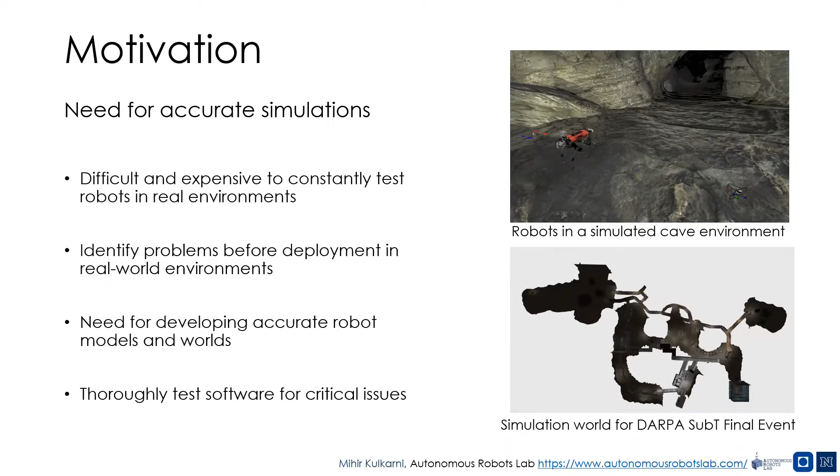This work is presented in 3 parts. The first part focuses on developing the capability of performing accurate simulations. The process to create robot models and simulation worlds is described to rapidly test and evaluate algorithms before deploying them on real-world systems. Using these capabilities in the second part, a framework for multi-robot coordination for exploration of complex underground environments is proposed.

A complete framework for centralized multi-robot planning strategy to efficiently explore the environment in presence of communication constraints is developed, and evaluations are performed in simulation using multiple robots. The robot models developed in part 1 are used to evaluate the performance of the framework. The final part of this presentation details the contributions to the DARPA Subterranean Challenge as a part of Team Cerberus.

Field testing of robots in real environments is necessary. However, during the deployment phase, it may turn out to be time and resource consuming. It requires significant setup time, and minor issues in hardware may take hours to resolve. With all of this, the testing of algorithms during development is delayed.

A faster alternative to performing real-world tests is by running computer simulations. They are fast, repeatable, and with the advent of better simulators, they are becoming increasingly reliable. It is possible to easily test out the algorithms in simulations to debug and evaluate them quickly without fear of any damage to the robots or to its hardware. While real-world tests are necessary before large-scale deployments, as they point out issues in the systems, simulations help with rapid development and testing to ensure that the software on the robots is bug-free.

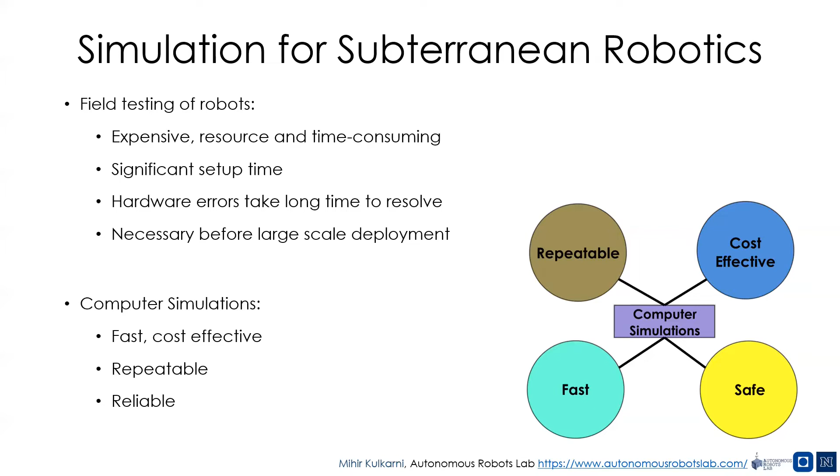We develop robot models to accurately simulate the sensors and dynamics for testing our planning algorithms. Ignition and Gazebo simulators are used with ROS-based interfaces, allowing to interact with the simulated entities. These simulators use an XML-based robot description language. These are the URDF, which is the Unified Robot Description Format, and the newer Simulation Description Format, or the SDF. These formats allow description of components, actuators, sensors, and links on the real robot. In the next few slides, I will describe the process to create simulation models for the Ignition and Gazebo simulators.

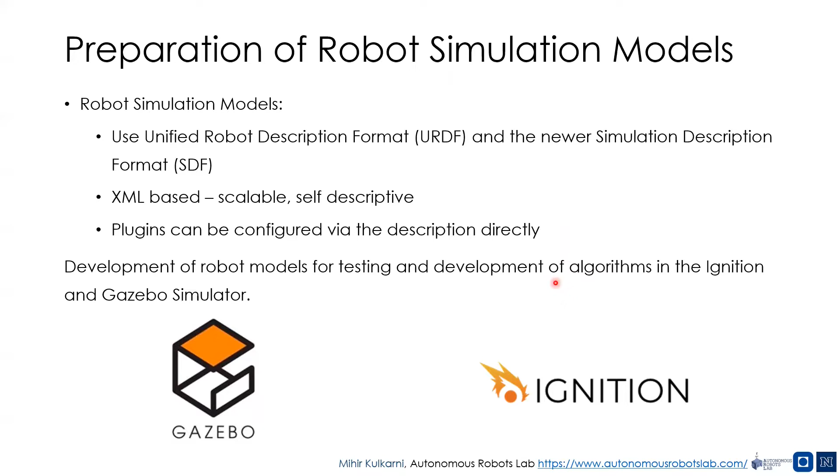A robot in the Ignition simulator is defined using a central structural component with sensors, actuators, and other entities connected to it. The code required for the functioning of simulated components is dynamically loaded as plugins as the robot is spawned in the simulator. The visual component of the robot model is a textured mesh exported from a CAD modeling software. A similar mesh is defined for collision, and this is checked with the environment for detecting the collisions of the robot with the environment.

The rotors of the robot are defined with respect to the base link, and a revolute joint allows the motion. Each rotor is connected to a simulated actuator, which in turn is controlled by a multi-copter plugin responsible for providing a high-level control interface to the user. The dynamic characteristics of each of these models are also closely matched with the real robots using data with the aid of motion capture systems. Various components and sensors on board the robot are added, and their parameters are based on the configuration of the sensors on the real system.

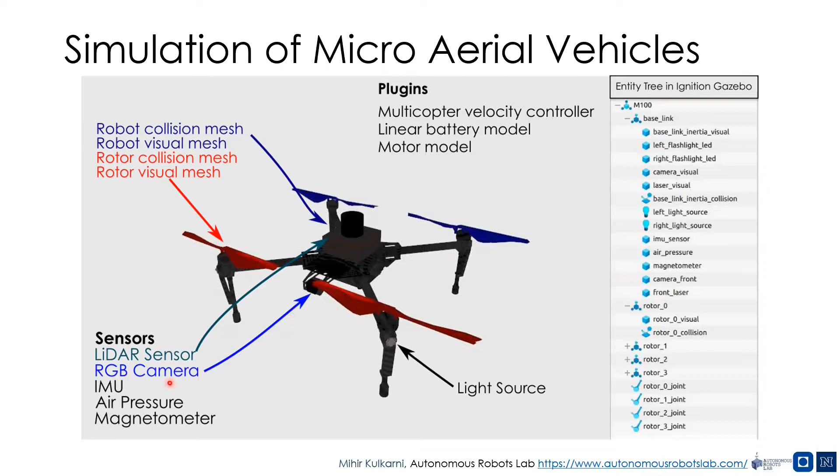This process was used to model the robots submitted for the open source repositories for the DARPA Subterranean Challenge. Simulation models for 4 flying robots were developed: the DJI M100 Aerial Scout, Gagarin, Resilient Microflyer Obelix, and a lightweight version of the Resilient Microflyer.

The robots 1, 3, and 4, that are the M100 Aerial Scout, Gagarin, and RMF Obelix, each contain an RGB camera and a 3D LiDAR sensor, while the other model, which is the lightweight Resilient Microflyer, contains only a stereo camera and 4 range sensors pointing radially outward from its center. A vertical time of flight sensor is also simulated atop the Gagarin simulation model for it to be able to see the surfaces of the ceiling.

As you can see, all models except the M100 Aerial Scout are collision tolerant and provide protection to the sensors and propellers using a cage-like structure. This allows the robot to endure collisions during the mission and continue exploration without damage to any of its components. These models are all open sourced and are available for use on GitHub and in the SubT Tech repo.

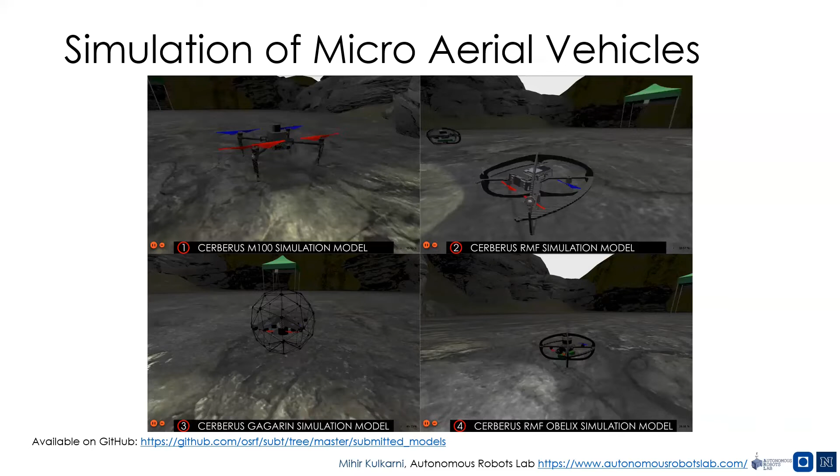We also developed a model of the wheeled or roving robot for testing our software on ground systems in Gazebo. The model is inspired by the InspectorBots Super Megabot platform. The physical robot was highly customized for participating in the DARPA Subterranean Challenge. A metal frame was built on top of the cuboid chassis, which hosted the onboard computer and a large set of sensors. This mesh was exported from a CAD software. For simulation purposes, only selected sensors on board the robot were added.

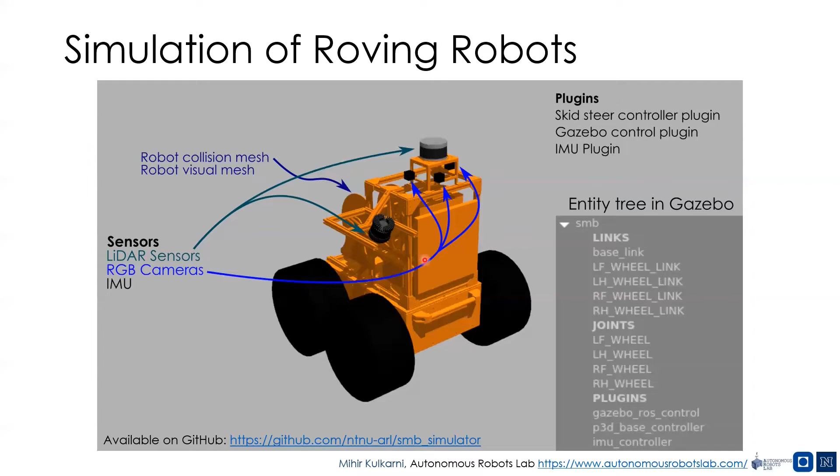The simulation model includes 2 3D LiDAR sensors, one mounted horizontally and one with an oblique orientation for it to be able to see the ground in front of the robot. 3 RGB cameras capture the images on the front and the sides of the robot. A skid steer controller plugin with a velocity interface is provided. The simulation model is also publicly available on GitHub.

It is particularly difficult to model and capture the complexity of real-world environments. Developments to the Ignition Simulator attempt to enable the quick creation of simulation environments using building blocks resembling tunnel, urban, and cave-like topologies. However, the complexity of the world and the variations that are observed are limited by the number and variations of the building blocks created. Reconstruction of real environments is significantly accurate, and it is an alternative to building synthetic worlds. Previously collected point cloud data can be utilized to reconstruct a mesh of the environment to be used in simulation.

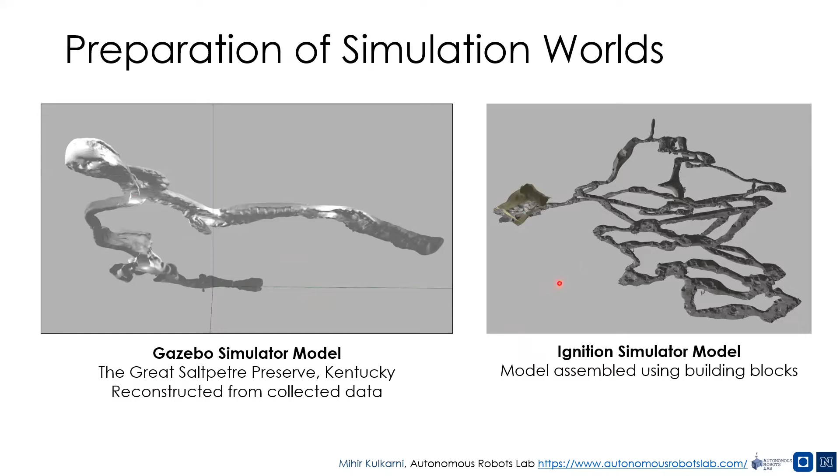We show the process to construct a mesh from the collected data. Handheld data collection was performed in the Subway Cave in California. This is a natural lava tube with smooth features. A Velodyne Puck 16-beam LiDAR was used to collect the point cloud data of the cave, while a mapping framework was used to incrementally aggregate the submaps and align them with each other to form a consistent global map. We use this global map and export the surfaces of the environment as a mesh that can be opened with a CAD modeling software.

A step-by-step procedure to create simulation environments is shown in this image. Signed distance field volumetric maps are incrementally built using a fixed time window by a mapping framework. The fused mesh is then exported as a Stanford polygon format file and opened in MeshLab software. This mesh contains noisy information, excess triangles, and incomplete surfaces with cavities.

Triangles projecting outside the surface are removed manually, and Poisson surface reconstruction is performed to close cavities. This results in a smooth mesh with watertight surfaces that preserves existing features. Once the mesh is processed, a simulation world is created to include the model of the mesh. Our robots and worlds created using this process are then used to test out our algorithms.

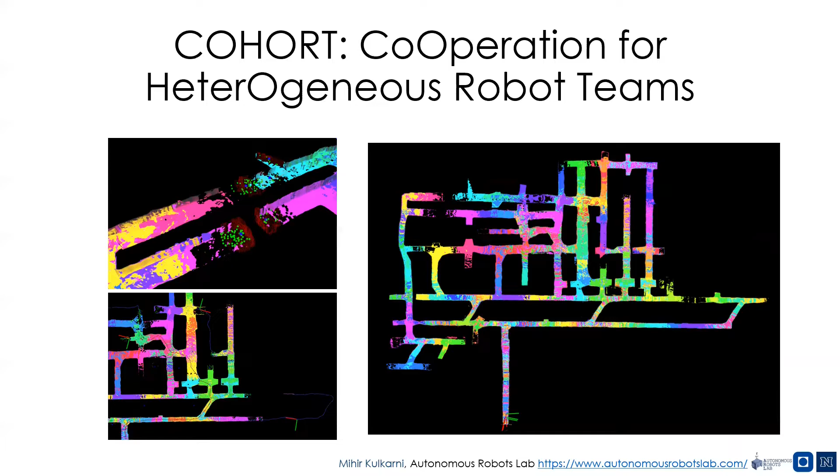In the next part of the presentation, I will describe Cohort, a multi-robot cooperation framework for heterogeneous teams of robots. This framework is centralized and runs on a central computation hub, providing the required resources for processing. Cohort assumes a common aligned global frame of reference for all the robots and is resilient to communication loss. The robots can explore regions outside the communication range, returning periodically to transfer the data.

Each robot in the system is equipped with onboard autonomy based on the GBPlanner 2 framework. This provides the required onboard capabilities to each robot to independently explore the environment. Cohort identifies global frontiers for the entire team of robots and repositions each individual robot to maximize the exploration performed by the entire team and efficiently explores complex multi-branching topologies.

A centralized multi-robot mapping framework is used for aggregating and aligning the individual maps generated by each robot in the common global frame. Maps are built using a signed distance field representation recorded over a fixed window. This representation is characterized by discretizing the environment into cubical voxels of fixed size, each containing information about its distance from a detected point on a surface using an onboard sensor. Raycasting is performed to calculate the values of the signed distance field, where each voxel contains distance to the nearest surfaces observed by the sensor.

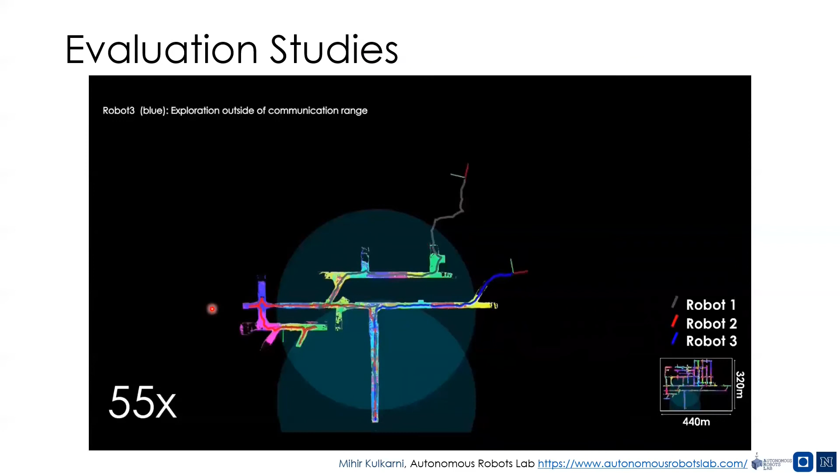This video shows a 52-minute simulation study using simulated aerial robots in an environment inspired by the NIOSH mine in Pittsburgh. This is scaled roughly 2 times the original size. We used 3 robots, namely 1 RMF Obelix and 2 M100 aerial scouts discussed earlier in the presentation. The endurances of these robots are extended to 2000 seconds and 2500 seconds respectively.

The communication is enabled within the Euclidean distance of 2 points where simulated network modules are placed, and these are shown with cyan circles. We can see the submaps update every time a robot is within the communication range, and all the robots return home at the end of their flight endurance.

In the next mission, a comparison is made between 3 aerial robots having only onboard GB planner exploring independently versus a similar setup having cohort and onboard GB planners without any communication constraints throughout the mission. This mission is conducted for a duration of 2000 seconds. As expected, we see here that robots without a central coordination strategy tend to follow each other and visit previously explored areas, while cohort guides the robots to new frontiers and rapidly explores the full map.

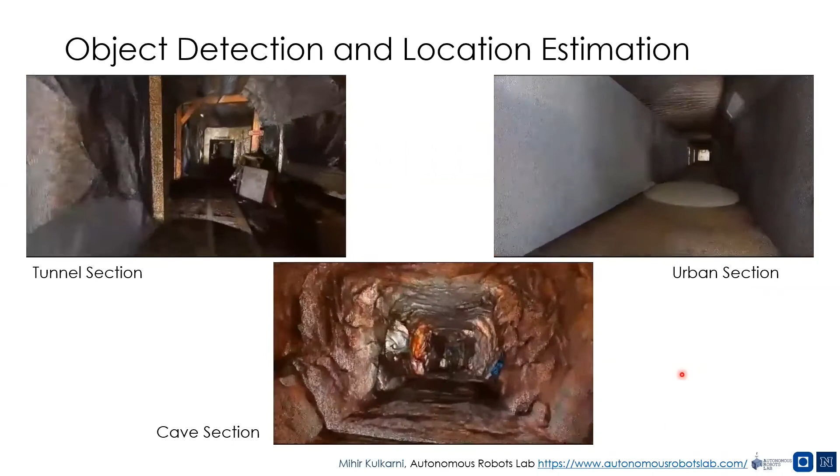In this slide, the fly-through videos show the complexity of the 3 sections of the final environment with the locations of each artifact. Entry into each kind of section starts from a common branching point near the entrance of the environment. We can see the different kinds of topologies, varying complexities and challenges posed by each kind of environment. These are all interconnected with narrow corridors, and artifacts are present throughout the competition environment.

10 classes of artifacts were announced for the final circuit. They were namely survivor, backpack, vent, drill, rope, fire extinguisher, phone, helmet, a sub-T cube, and carbon dioxide gas. The phone, sub-T cube, and carbon dioxide gas were detected by Bluetooth and gas sensors respectively, and the object detector was not trained to detect them.

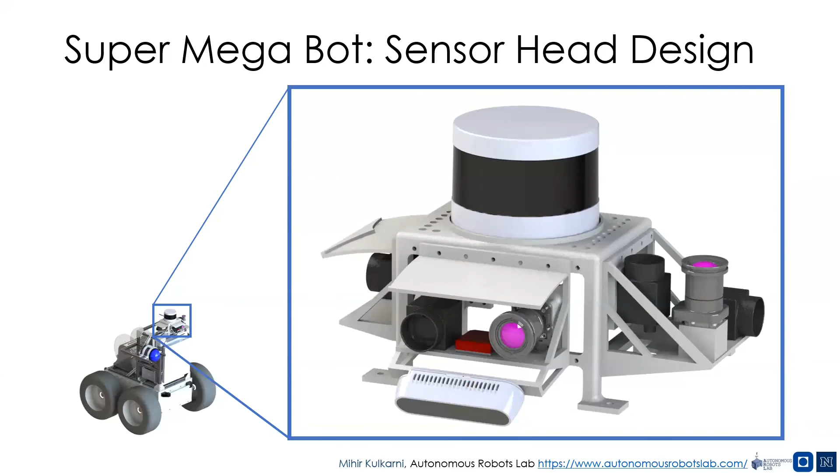The image shows the design of the sensor head with 4 FLIR Blackfly RGB cameras, 2 FLIR Boson thermal cameras, a Velodyne Puck 16-beam LiDAR, a downward-facing RealSense stereo camera, and a VectorNav VN100 IMU module. This design was 3D printed using a nylon polymer material with infused glass beads for strength. The image shows the design model alongside the 3D printed model of the real robot.

Some software additions were also done on the SMB platform. Most of the sensor drivers on the robot were treated as nodelets. The nodelets allow for zero-copy of large messages between other nodelets on the same threads. This allows for faster transfer of large images and point cloud data between two nodelets on the same process. Multiple nodelets can be loaded by a ROS provided nodelet manager and are executed on the same process.

On occasions, these become idle and are required to be restarted. The default nodelet manager cannot do this, and respawning the entire manager causes it to kill the drivers that control other sensors. To prevent this, a software package was developed to identify and respawn unresponsive nodelets without affecting the ones that are already running.

In addition, the drive system of SMB was torque-based. This allowed for more intuitive handling of the robot by the human operator. However, when the operator left control of the platform to pay attention to other robots of the team, the power to the wheels was removed. If this was done on a slope, it would cause the platform to roll and it could potentially damage itself and other robots. To prevent this, automatic braking functionality was added to the onboard control. This prevented it from moving when the operator stopped controlling it. This was also used to enable emergency braking of the robot.

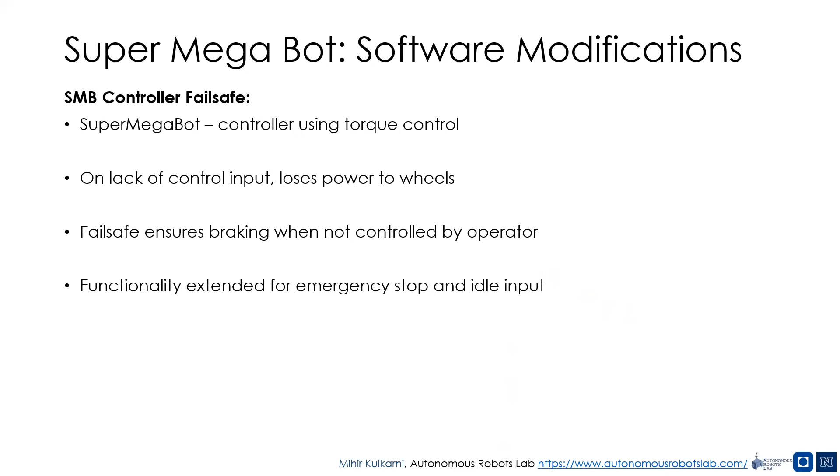I now conclude my contributions during this thesis. In the future, we plan to increase our reliance on simulations and develop increasingly accurate representations of the environments and robot models. Cohort will be made more modular and operate as a distributed system as opposed to a centralized framework. Having this would enable inter-robot interaction, and information can be shared among the robots performing the mission when they are in communication with each other.

Using the map terrain, the decision to use a ground robot or an aerial robot to explore a certain section of the environment can be made. And this will allow for more sophisticated coordination strategies to emerge.

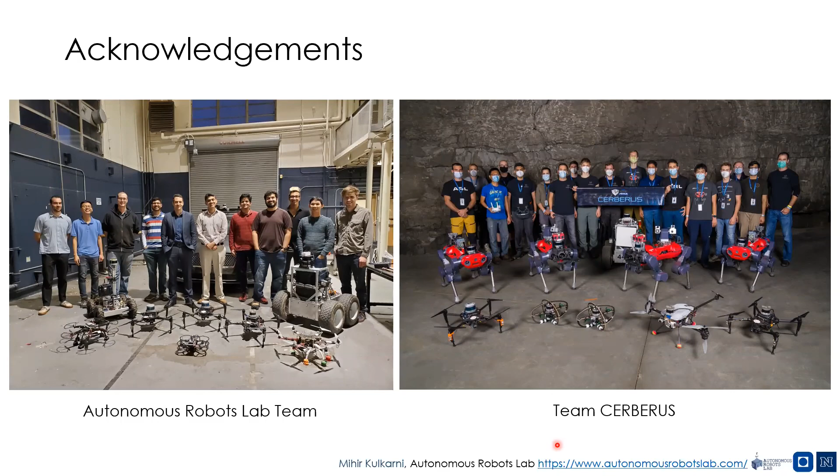This work would not have been possible without the support of a wonderful team helping me and guiding me along the way. I would like to thank all the members of the Autonomous Robots Lab and Team Cerberus for their constant help and guidance during this thesis. Working with such a diverse team spread throughout the world helped me learn a lot during this time.